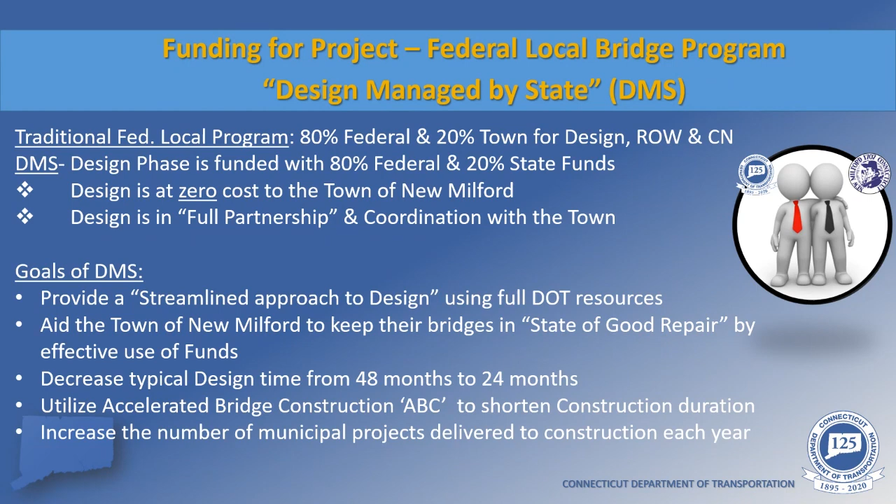Hi, this is Mayor Pete, and I'd like to welcome you to the Upland Road River project. Some of the project particulars: we'll start with a PowerPoint presentation. Replacement of the existing bridge is due to its poor condition. Expected timeframe spring of 2022, with approximately 6 to 7 months to completion. This is a partner project with the federal government, 20% town funded and 80% federally funded, and we've partnered with the state DOT administered design program since July 2019. We look forward to the presentation and thank you for being here for our great town, best town in the USA, New Milford. Thank you.

I would now like to introduce the project team. I am Preeti Bardwaj, the project manager, shown in the center. To my left are the department's front office leadership, which includes Mr. Bart Sweeney, Division Chief of Bridges, and Mr. Robbie Barakat, Principal Engineer. To my right are Mr. Mark Burns, Project Engineer, and Mr. Dennis McDonald from the Office of Rights of Way.

The consultant liaison engineers who have brought this project to 30% design completion are Close, Jensen, and Miller. From CJM, we have Mr. Mike Brady, Project Manager, and Mr. Dan Carnine, Senior Engineer.

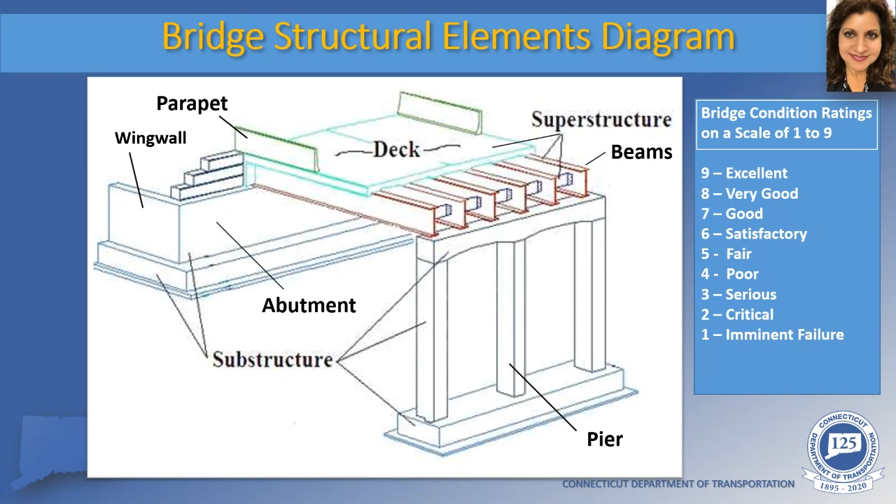Bridge number 5115 carries Upland Road over East Aspetuck River in the town of New Milford. The bridge is located 100 feet east of State Route 202, also known as Litchfield Road.

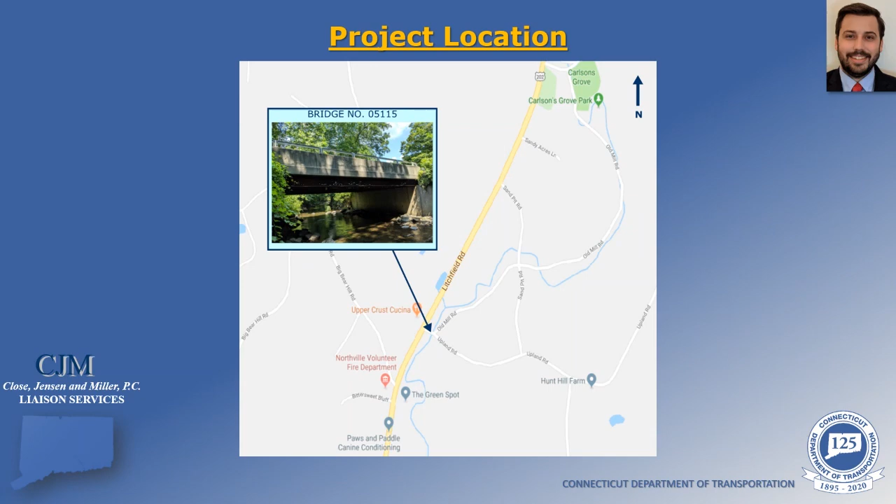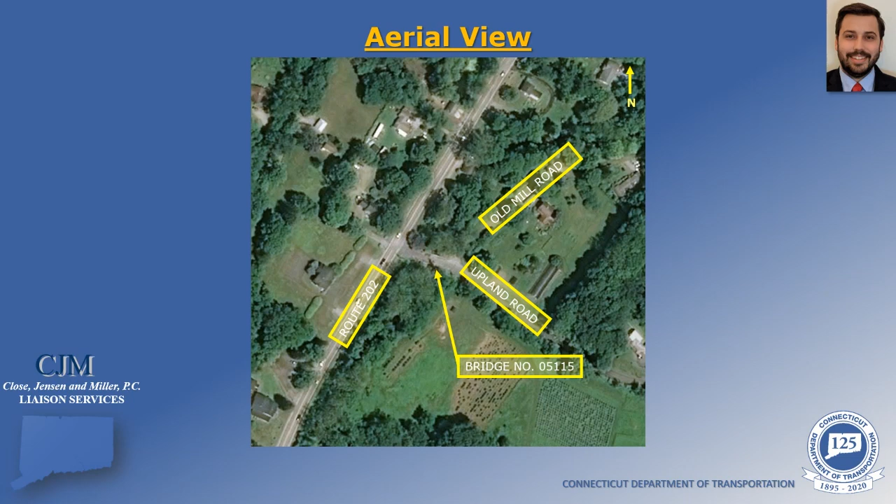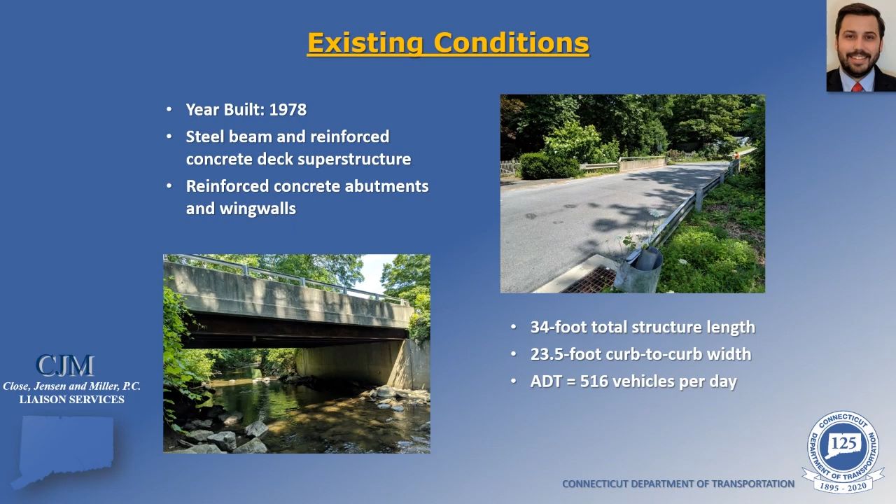The existing bridge was originally built in 1978 and consists of a steel beam and reinforced concrete deck superstructure supported by reinforced concrete abutments. The structure is 34 feet long, has a 23.5-foot curb-to-curb width, and an estimated average daily traffic of 516 vehicles per day.

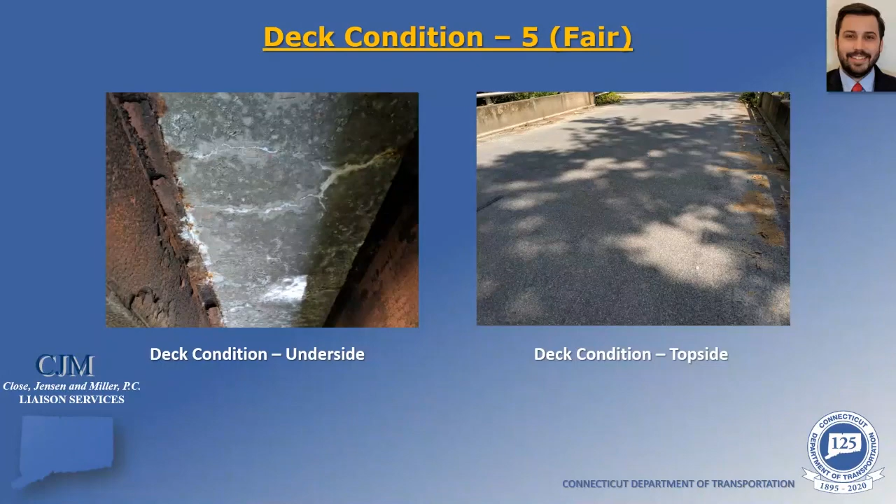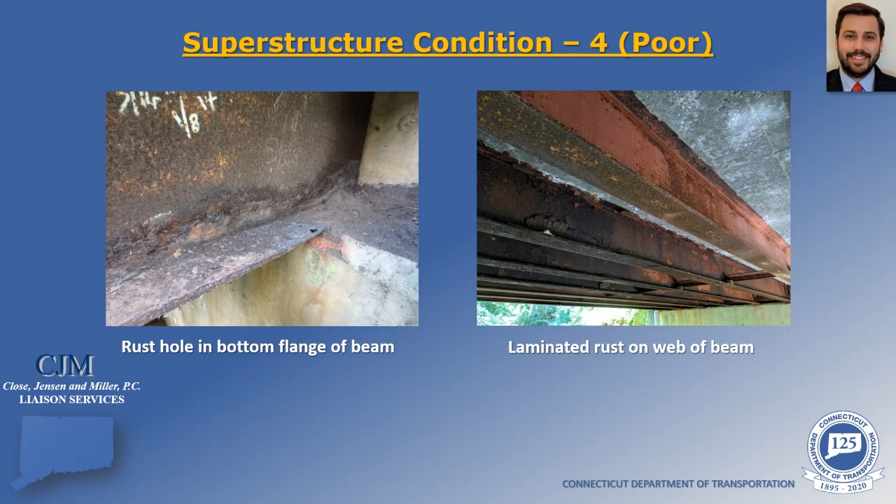The substructure for this bridge is in good condition with an overall rating of 7. Just minor deterioration was noted on both abutments.

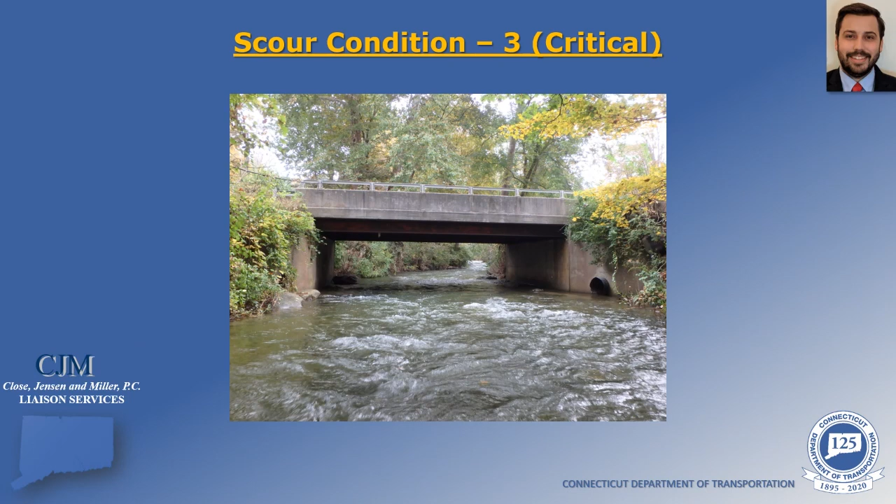The bridge also has a scour critical rating of 3, which means soil and rock under the bridge has potential to erode during an extreme storm event and could possibly fail. This scour critical rating also makes the bridge eligible for replacement under the federal local bridge program.

Due to the condition of the existing bridge, a full bridge replacement is required. The proposed bridge will consist of a pre-stressed concrete deck unit superstructure on integral abutments.

The steel piles will prevent any potential bridge failure during an extreme storm event and eliminate the scour critical rating. The top portion of the existing substructure will be removed and reinforced concrete caps will be constructed on top.

On the top side of the bridge, open metal bridge rail will be installed across the structure and terminate into reinforced concrete end walls at all 4 corners of the bridge.

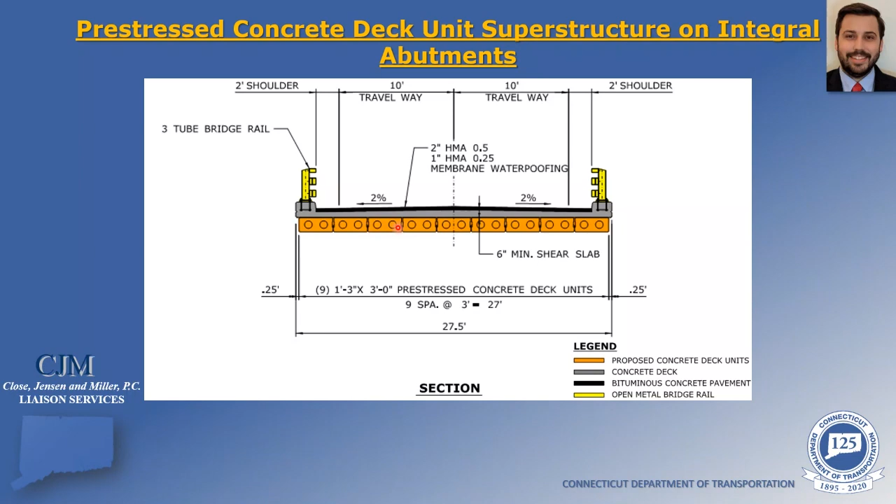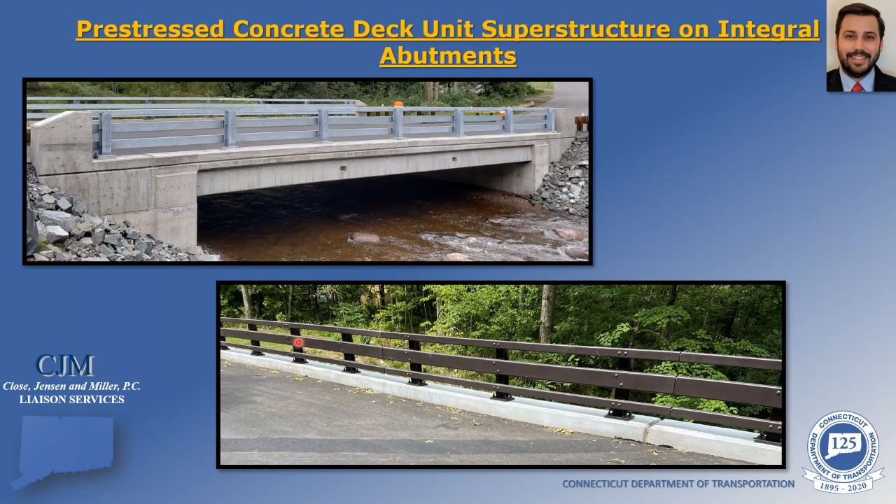Portions of Old Mill Road to the right and the majority of the driveway to the left of the bridge will also have to be reconstructed. Catch basins and drainage pipes within the project limits will also be replaced.

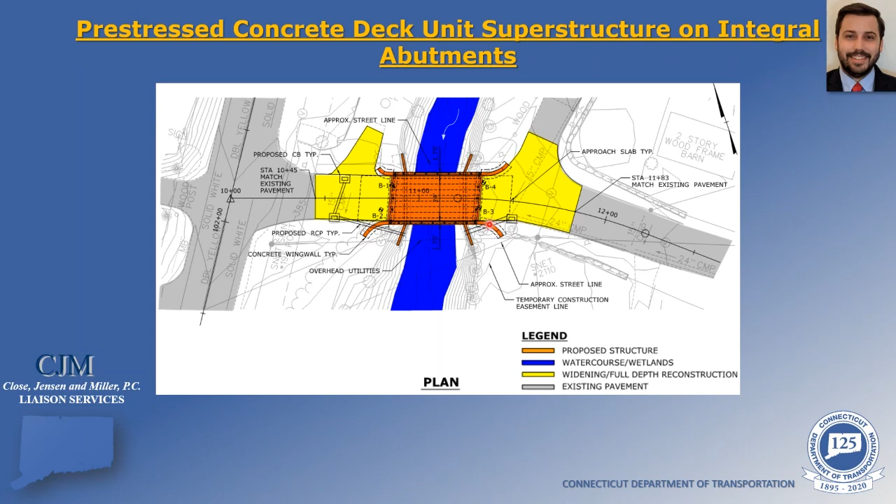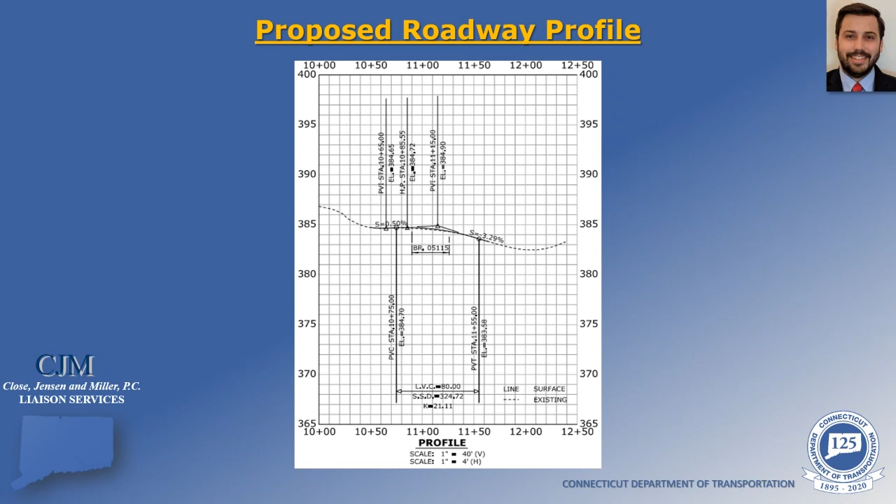The existing roadway alignment will be maintained as close as possible for the bridge replacement. This slide shows the vertical profile of Upland Road. The existing road is shown as the dashed line, and the proposed roadway is shown as the solid line.

There are overhead utilities located along the south side of the bridge, across the east approach, and along Route 202. These overhead wires may need to be slightly adjusted to accommodate construction and crane activities, but we do not anticipate any disruptions to power, phone, cable, or internet service.

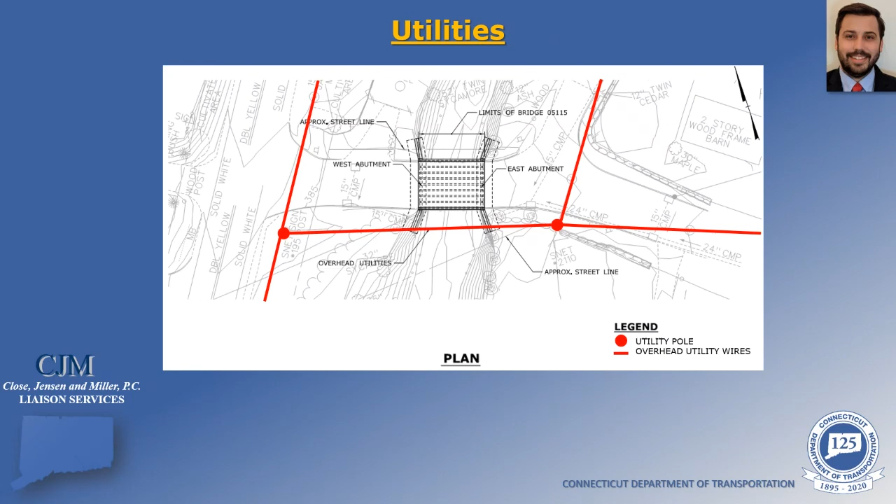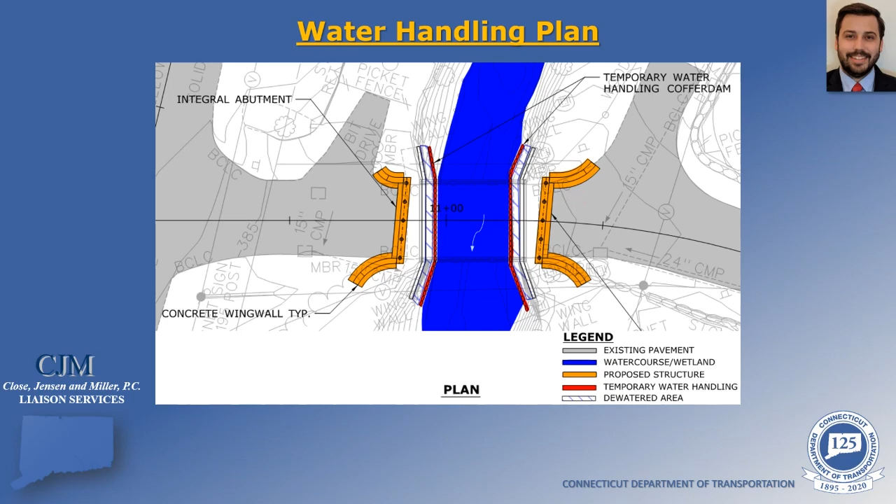Construction will utilize a 2.3-mile detour consisting of state and local roads. Vehicles following the detour from the west side of the bridge will have to turn right onto Route 202, then turn right onto Wheaton Road, and then a final right onto Upland Road.

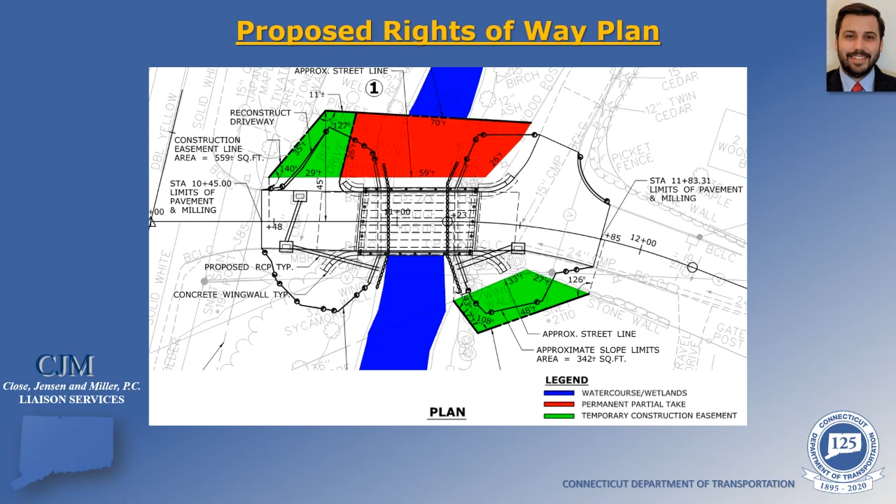The rights-of-way process is just beginning for this project, and individual property owners will be contacted as the project progresses. The department's right-of-way division will explain this process in more detail later in the presentation.

We will obtain all necessary permits for this project. We anticipate obtaining a New Milford Inland Wetlands Permit, a U.S. Army Corps of Engineers General Permit, and a Flood Management Certification.

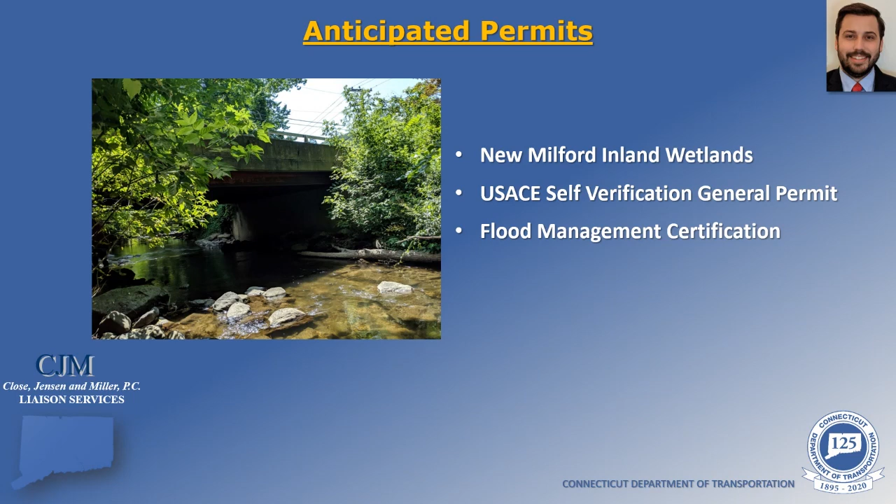The proposed construction duration is 6 to 8 months with an anticipated construction start of spring 2022. Construction will be funded by 80% federal and 20% town funds. The estimated construction cost is $1,780,000 with a municipal share of $356,000.

This concludes the technical portion of tonight's presentation. I will now turn it over to Dennis McDonald from the Division of Rights-of-Way.

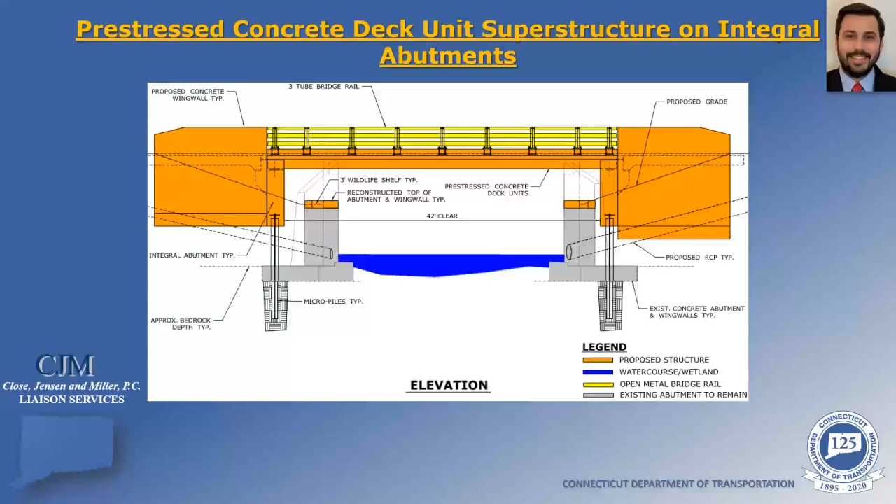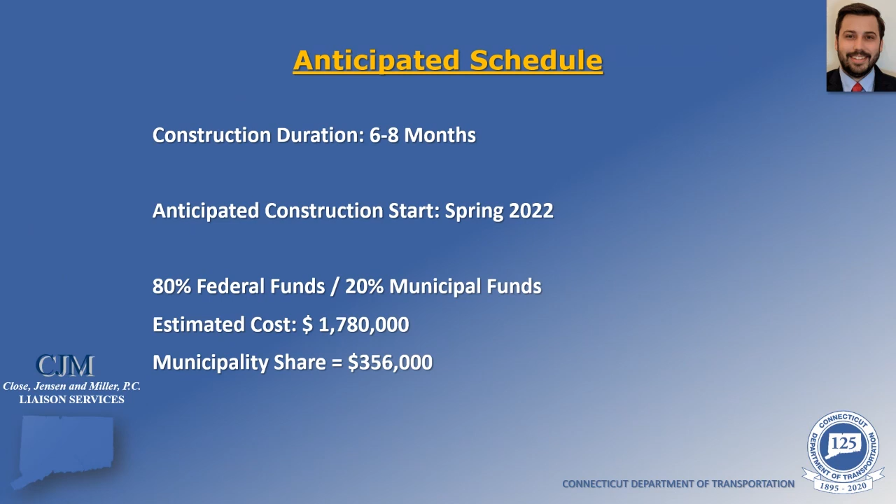Okay, looks like we have another question, and the question is, when is construction anticipated to start, and how long will the detour be in place? Dan from Close Jensen and Miller, will you please address this question? Sure. Well, first of all, construction is anticipated to start in spring 2022. Most of the construction will be performed utilizing a detour, which will be in place 6 to 8 months. That signed detour will be 2.3 miles long and consist of Route 202, Wheaton Road, and then the remaining portion of Upland Road. Thank you very much.